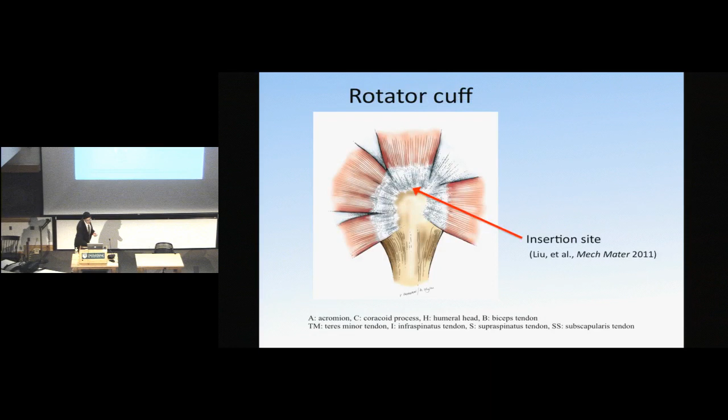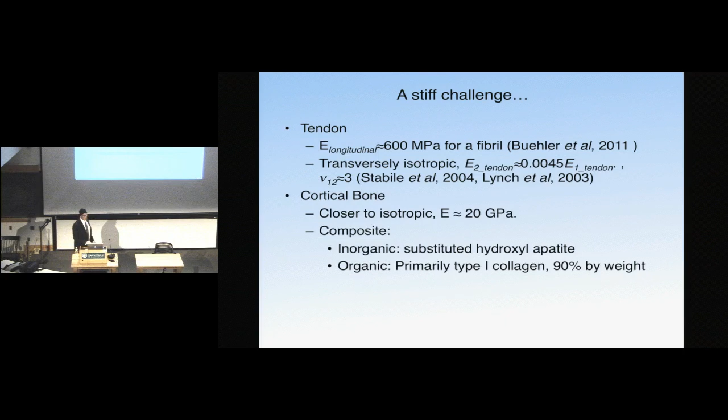For those of you familiar with the constants in materials engineering, you can see there's a huge mismatch. There's about a 2 order of magnitude mismatch in stiffness between tendon and bone. And then there are some numbers that a lot of you might not have seen before for the mismatch in Poisson contraction. A tendon could have a Poisson's ratio of about 3, and that's admissible for a highly anisotropic material. That gets connected to a material that's stiff, but then has a Poisson ratio more in line with what we're used to. Many of you know this, of course.

When you attach 2 dissimilar materials together, the challenge you have to overcome is a stress concentration. In the case of linear elasticity, it's actually a stress singularity that can occur under certain conditions at the attachment between these 2 different materials. So we're plotting shear and principal stresses, and in a very localized region, right around the edge of a free boundary, the stress can shoot up to infinity.

In an engineering structure made of metals, that's not always so big of a problem, because metals undergo plasticity, nonlinearity, in which the material becomes more compliant if it has excessive strains. That directs the peak stresses away from the point of highest stress concentration. In a biological material, the stress-strain behavior is opposite: the higher the straining, the stiffer it becomes, and the more stress is localized. So this is a challenge that the body has to overcome.

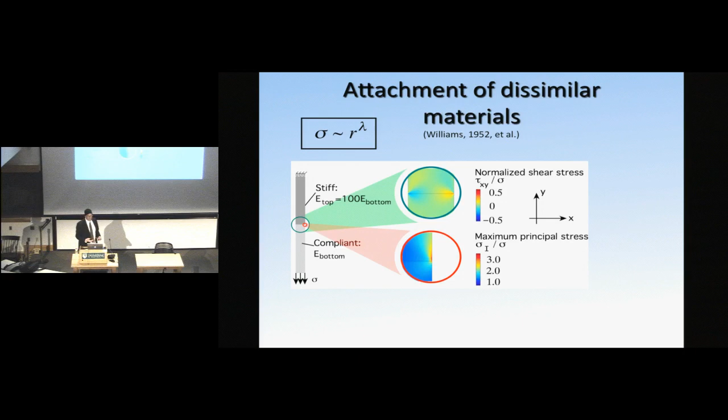You might have intuition on this. There are plenty of cases where we exploit these bimaterial interfaces every day. Does anyone here eat asparagus? No one? I hear people who do tell me that when you buy the whole plant, there's a wooden portion, a wood-like portion, and then there's the soft part that you eat. When you break the asparagus, the fracture occurs right at the interface between the 2 materials. Another place we see it in nature is at the attachment of a grape to the stem. If the grape hasn't started to dry out, so there's a gradient in material properties, when you pull on the grape, it comes right off the stem.

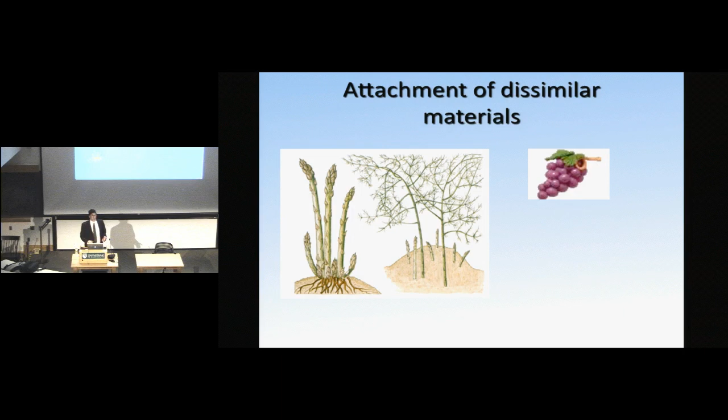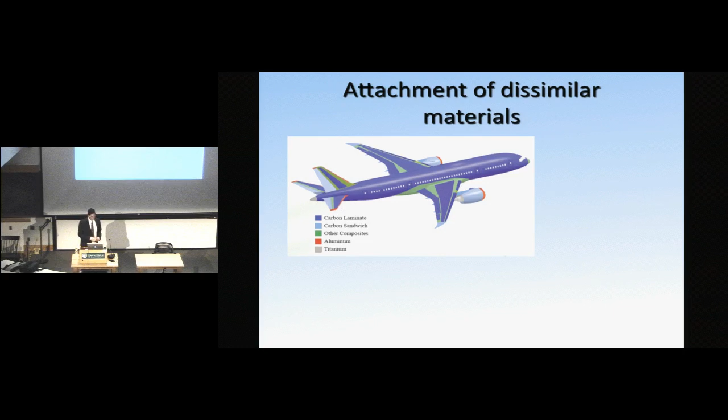Those are situations in which it's very helpful for us to have these stress singularities, but it's a constant challenge in engineering. On the Boeing 787, any place where two composites or metal and composite touch one another, there's a lot of effort put into trying to get rid of these stress concentrations. It's a big problem, and some of the first aircraft to use composite stabilizers on an aluminum fuselage met with disaster.

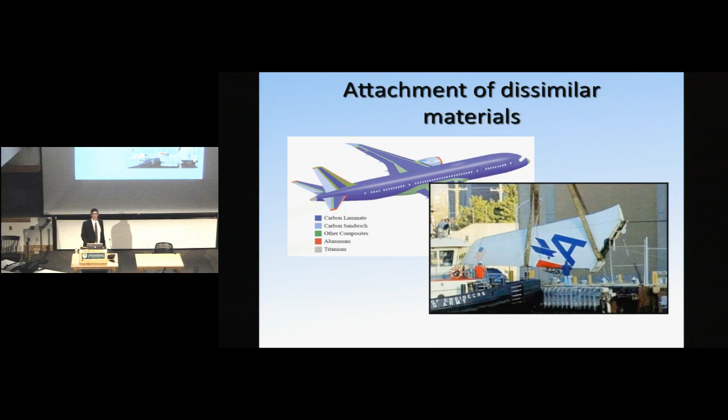So now a lot of us have intuition for how to get rid of these stress concentrations as well. A place where you see this is in putting gum under a table.

Has anyone ever tried this? You put gum under a table. The dean said he was going to be here, so you probably won't raise your hand if you have this experience. The dean doesn't seem to be here. Oh yeah, never mind.

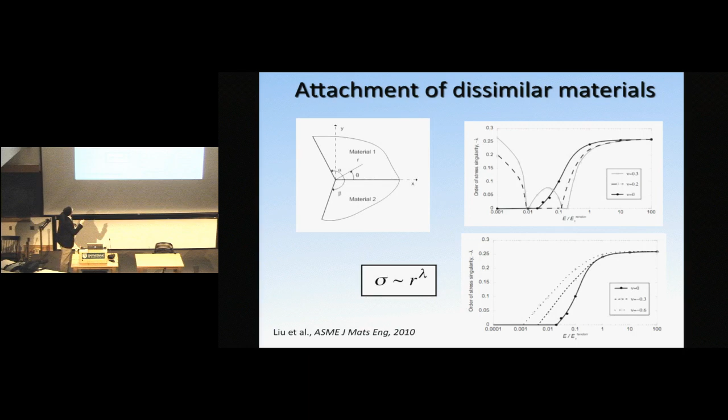So change the interface angle. Look at tendon up here, bone on the bottom, and an interface angle beta between the two. There are regions over which the order of the singularity drops from something negative, meaning the stress is infinite, down to zero. So the idea is that if you spread out the gum far enough, the lines of force will connect to the table and there'll be no singularity.

Other ways you can do it are rubbing the gum on your pants to get a bit of a gradient in there, so with a lower mismatch in stiffness the singularity damps down. And if you're lucky to find an old table with teeth sticking out so the wood can interdigitate into the gum, that works too. The body actually uses all three of these mechanisms.

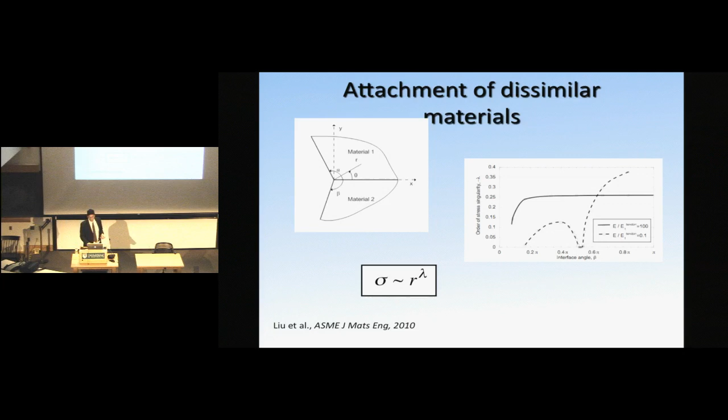There's also a gradient of material properties. We go from a material that is highly aligned and has no mineral in it to a highly mineralized material, the bone. In between, over the scale of microns, there's a gradient in mineralization from tendon to bone. And what can't be seen here, but can be seen in phase contrast X-ray, is that there are teeth coming out of the bone. At the microscale, there's a little interdigitation of the two materials.

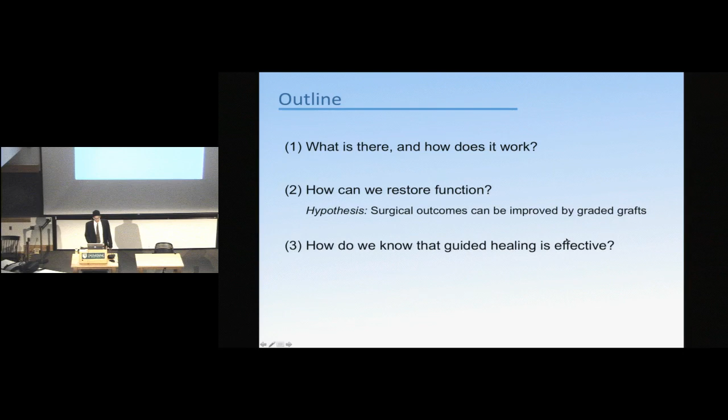We tested a rat rotator cuff tendon-to-insertion site, actually from my colleague Steve Thomopoulos, in uniaxial tension, looked at strain fields and estimated the modulus. It turns out there's a region of material between tendon and bone that is more compliant than either tendon or bone. So the body takes one of the worst biomaterial mismatches in nature and makes it even worse by throwing a piece of material in between.

This was a mystery we pursued before anything else. So we did some simple optimization analyses to get a sense of what this might do. This is an admittedly very crude model—we're taking the humeral head and replacing it with this linear elastic 3-band model just to get intuition for why this might be optimal.

It turns out that a gradient insertion is capable of knocking out the stress concentration entirely. There are 3 bands, and we're looking at the stresses in the tendon, the insertion site, and the bone. The stress concentrations show up between the two, in the region of greatest mismatch, and also at the exterior.

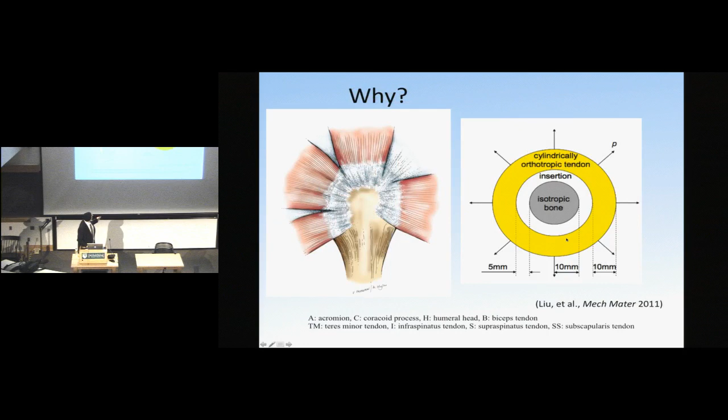But if we allow the modulus of the material to shift as a function of radial position, we can end up with a stress distribution where the stress inside the bone and at the bone-insertion site interface is lower than the remote stress. This is the maximum radial stress. This comes, of course, at the cost of increasing tangential stresses, sort of like a porthole in a ship.

And indeed, the material property distribution—these are moduli stretching from bone to tendon, or the other way around—shows that the moduli achieving this are situations where there's a region of compliant material between tendon and bone that allows stresses to be diverted from the radial direction to the transverse direction around the bone.

So the next question we asked is, how does the body achieve this compliant region? The first step, of course, the first try, would be to come up with a replication of those properties.

So we used Raman microprobe spectroscopy to get a spatial distribution of mineral between tendon and bone. I won't go into the details of how that works, but what came out was this: between tendon and bone, analyzing the Raman data to estimate the volume fraction of mineral phase, this dip in stiffness comes despite a linear increase in the amount of mineral. So stiffness goes down even though mineralization goes up. This mineral phase is 100 times stiffer than the unmineralized tissue.

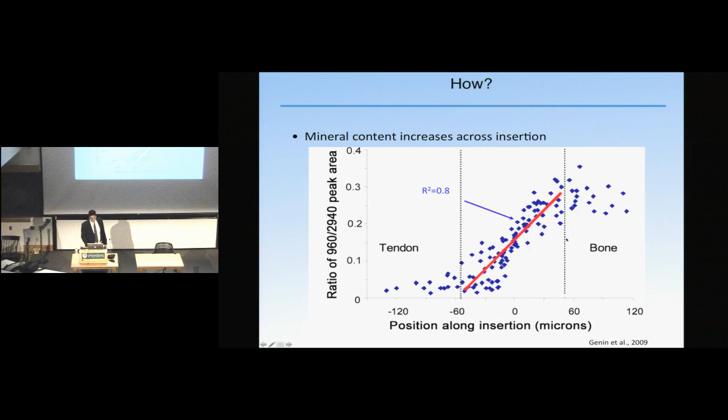So then the hypothesis we tested—we looked at orientation distribution using polarized light microscopy, and found there's also a competing gradient in the orientation distribution of collagen fibers. The idea is that collagen is a rod-like, bar-like protein, so it does best at taking stress along its axis. So there's a competing gradient, and we'll go into how that works in a moment.

It's just mentioned that the competing gradient is along the bone-to-tendon direction, but there's very little difference around the radius of the insertion site.

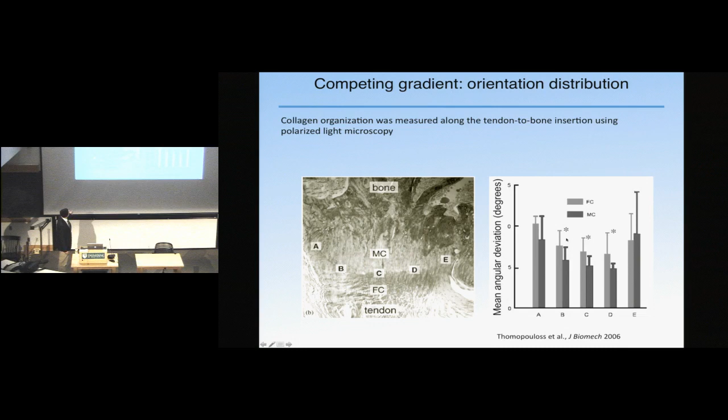Fibrils then agglomerate to fibers, and then these have large-scale undulations and are clasped together in fascicles. Fascicles within membrane give you tendon. So that structure's there, and we can integrate up over that hierarchical system.

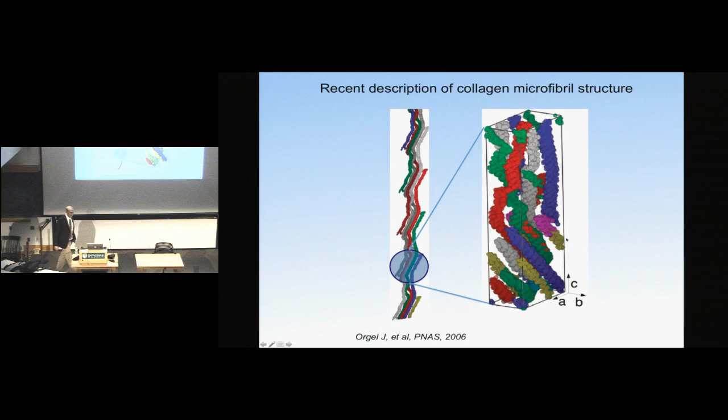So the question is, where does the mineral go inside the collagen? We have this structure, which was only recently identified, in which there's a somewhat twisted conformation of these collagen molecules. It's actually a very mild twist. This is shrunk down by a factor of 30, so it looks much greater than it is. These are almost straight rods, but not quite. So then the question is, where does the mineral go in there?

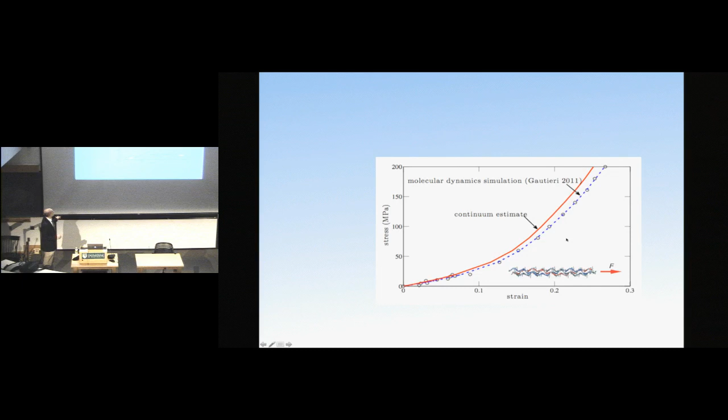Then we can get properties of these molecules. A colleague named Markus Buehler at MIT has taken this model and stretched it to end up with the mechanical properties of the fibril as a whole, and then we can get an effective continuum stress-strain relationship for one of these collagen fibrils that accounts for some of the structural aspects. I won't go into that detail.

The detail I do want to go into is where the mineral goes, and we were astounded to learn that this is a source of argument. So it's a fascinating argument. I want to summarize it quickly.

So there are some people who say that all mineral inside bone is on the interior of these fibrils, working only up on the inside. This is a TEM image where the dark phase is mineral, and where a lot of electrons go through is regions that are very poor in mineral. It's clear that there's a banding structure associated with the nanostructure of collagen that I'll get into in a moment. But then there's this AFM image which shows a fibril that has an enormous amount of mineral on its exterior, and so the plot thickens.

With AFM, the AFM community says, well, the way the TEM images are obtained is by taking bone and crushing it in a mortar and pestle, and of course that's going to knock off the mineral. But the TEM community argues that what's being done here is AFM in tapping mode, and yes, if you have rocks in Jello and you tap the Jello, you're going to feel the rocks, and the Jello is just not going to show up.

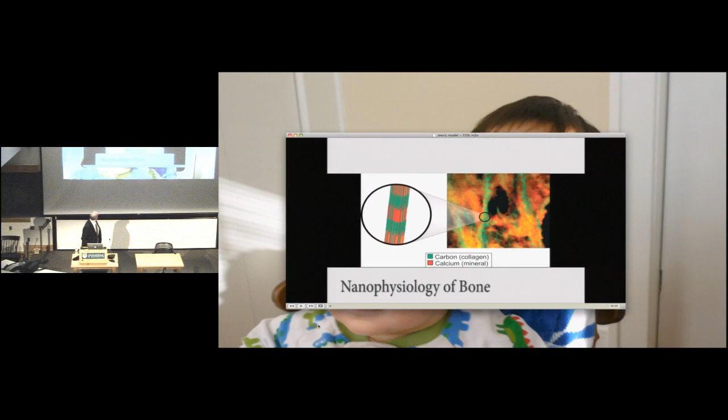And this probably won't work, so I'll instead... oh, maybe it is working. Yeah, so I'll instead pull up the movie over here. And I want to use this to describe the microstructure. So...

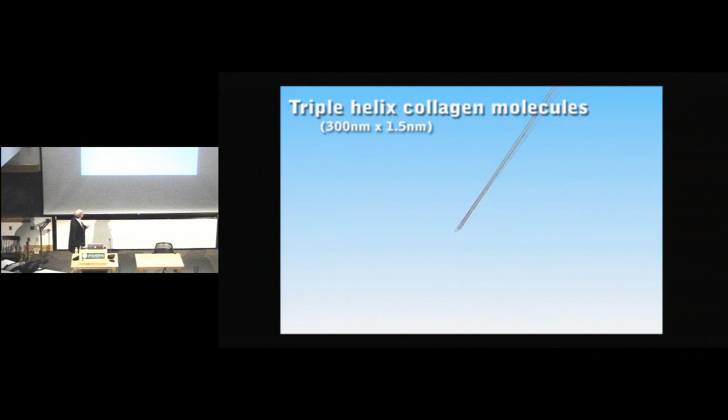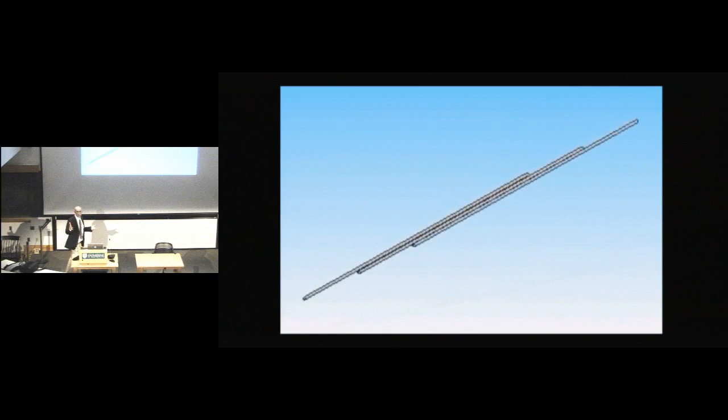All right, so what we start with in our microstructure is we approximate these very long tropocollagen molecules as rods. And then there's a certain stacking that shows up. This is going to be the basis of something like a Bravais lattice. This is how it's all going to stack together. And there's a specific staggering that shows up, based on the observations shown earlier from Orgel in the chart.

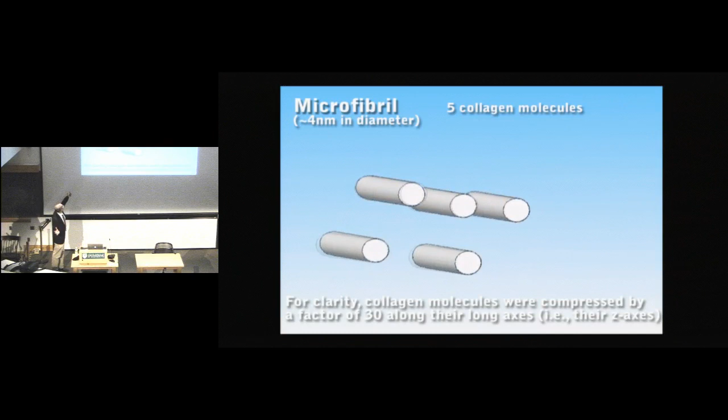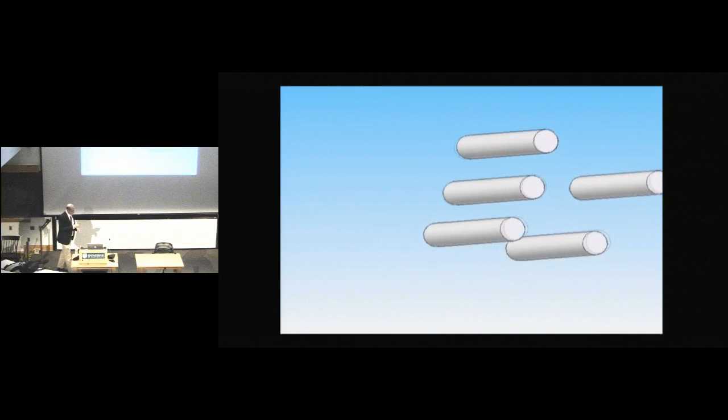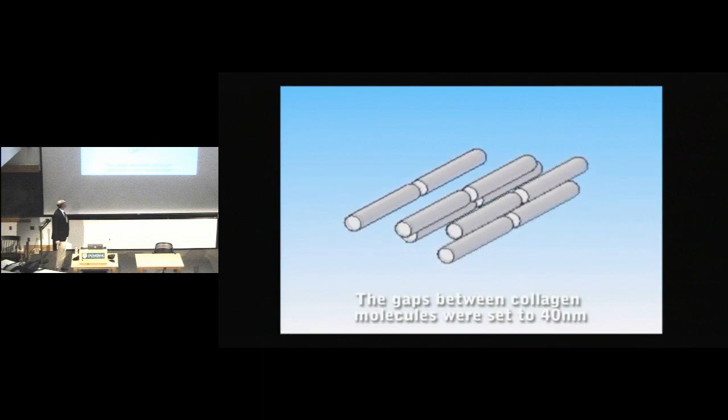And now we crush them down by a factor of 30 so you can see how they come together. So the staggering is a little bit clearer when we shrink down the axis by a factor of 30. And this should end quickly. And then the way these stack together is in a nominally orthorhombic Bravais lattice, with a very mild twist to it that we're not accounting for.

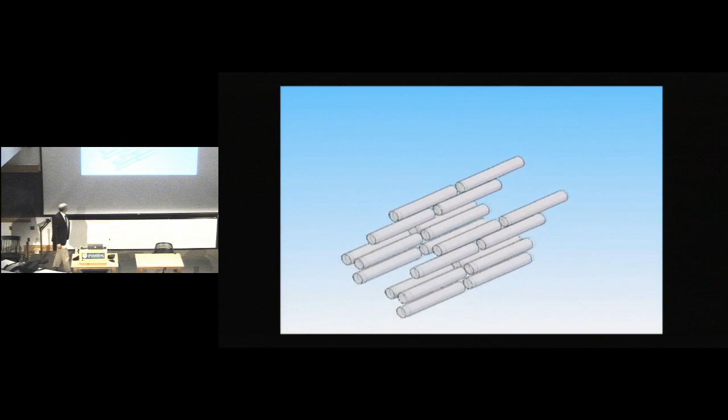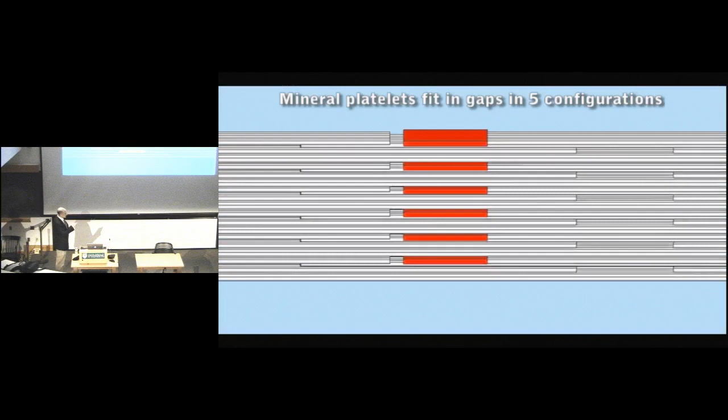And then when we take these out and stretch them back out, we end up with a structure that's very dense, that has pockets in it that can accommodate mineral only in a few directions. The mineral platelets are these dimensions, about 2 by 30 by 40 nanometers. And you can see there are only a few orientations in which they can fit in.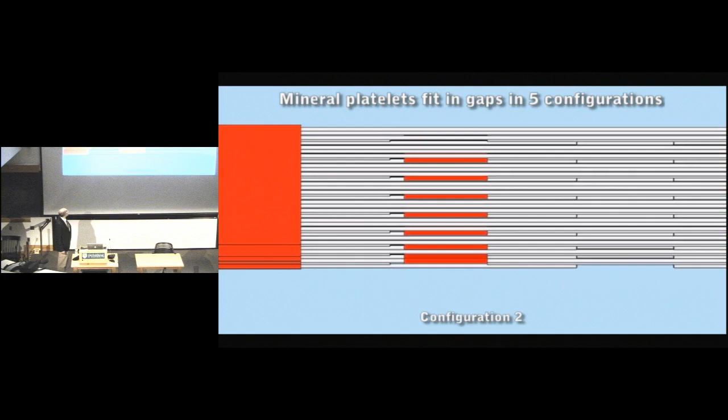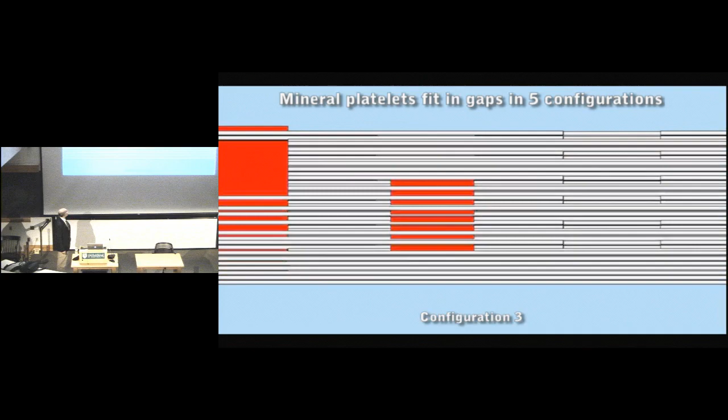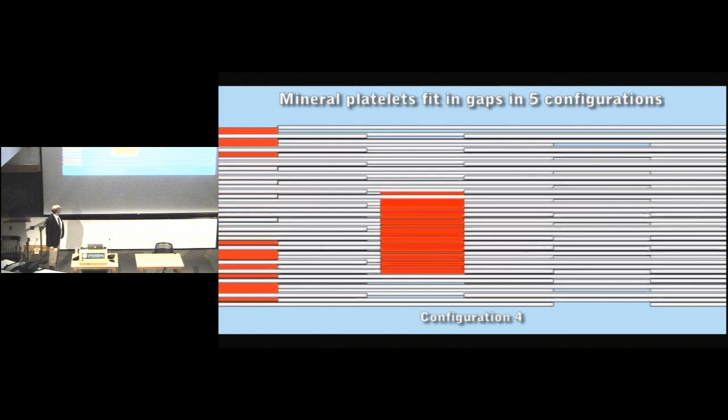And here's the second one coming up, as we roll around—there's a second one where mineral can fit in. And then there are a total of 5, with 3 independent, 3 different packing fractions that are allowable. So there's 2 more, I'm going to let it flow through these. And there's 1 more coming up here. Oh, that was—we miscounted. There are 5 configurations. Oh, there it is.

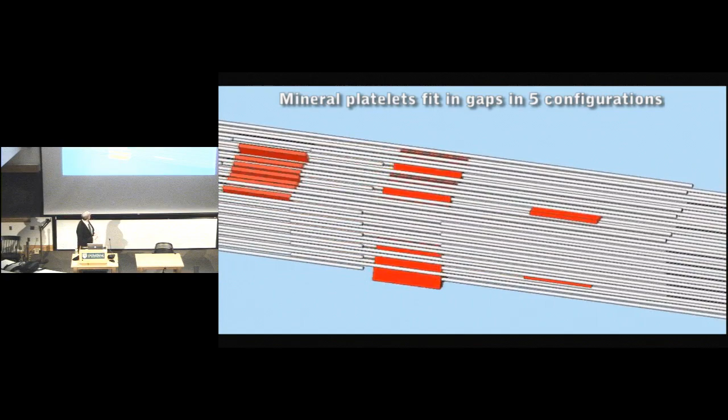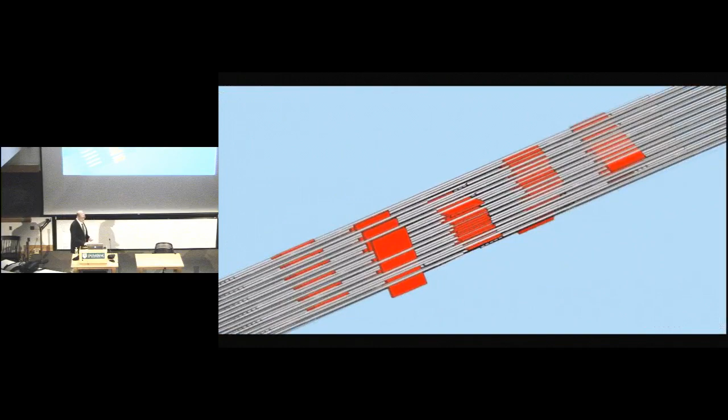And then when we zoom out, we get this banded pattern that appears, and that we see again in the TEM study. And so we think we finally closed the book on this very long debate as to what the nanophysiology of bone at this level looks like.

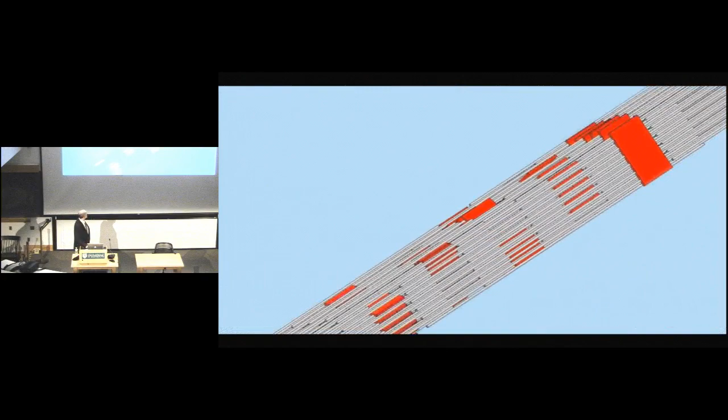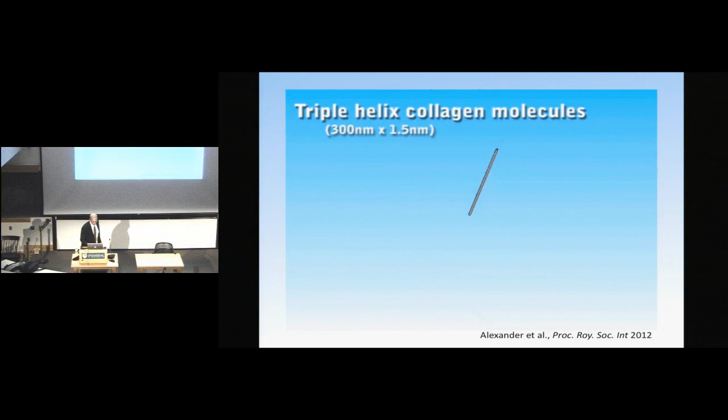There's still additional questions that I'll get to, and see if I can kill this. All right, so there's this. It's made up of this banded structure.

But there's still another question: there's definitely mineral on the outside of these fibrils, and the question is, where does it go? And the answer is we don't know. We have reason to believe that the mineral shows up on the interior of the fibrils first in development, in these partially mineralized tissues. And then the model that we believe the most is one in which mineral then extends as a sheath down the exterior fibrils and then grows to encompass the entire fibril.

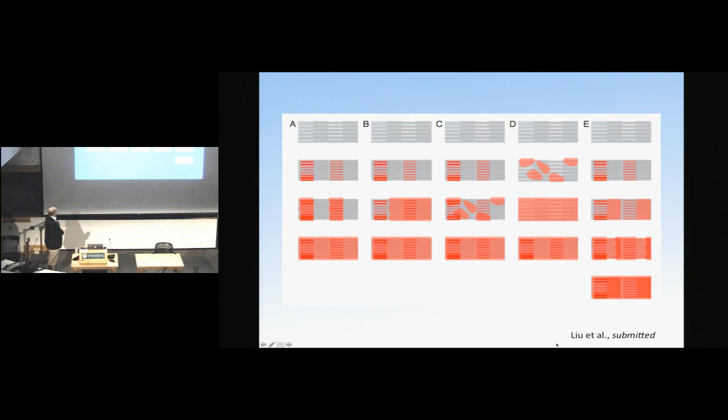But we can't be certain of that. It might grow—there might be nucleation, there might be inhibited nucleation on the exterior fibrils. So it might be that mineral grows from only one position along a fibril down to encompass the entire thing. Or it might be that it's promoted. We just do not have the data. So it might be that growth is inhibited and nucleation is promoted.

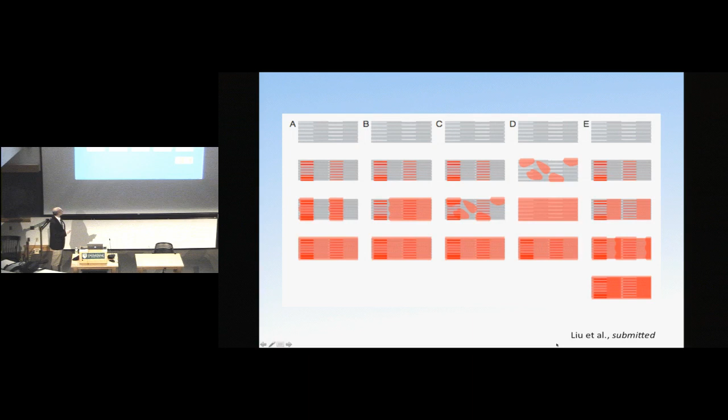So we end up with these structures that are pockmarked. There is a community that believes mineral grows first on the exterior fibrils, and only after the entire exterior is covered does mineral work its way into the interior fibrils. And then still another community that thinks there might be mineral with unknown conformation that works its way into these regions that are too small for a single Bravais lattice of the mineral phase to fit.

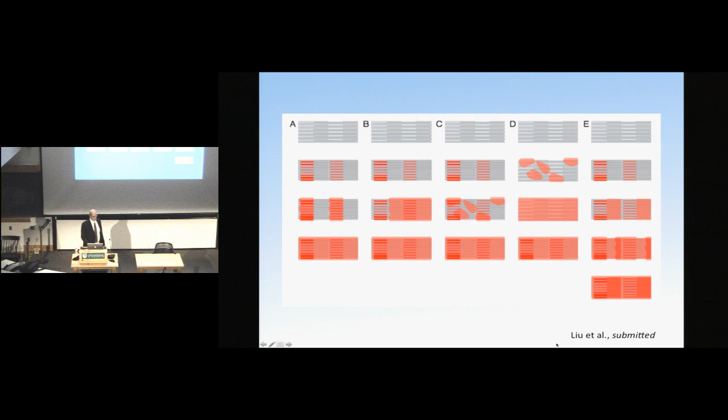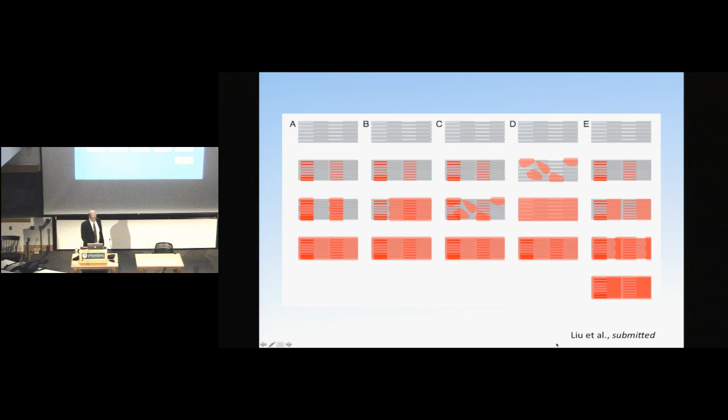So we explored the mechanical consequences of these with the goal of understanding how these properties arise. This involves a few steps of homogenization. The first step is to combine the material properties of this nonlinear collagen fibril, obtained not directly but only through molecular models—atomistic-like simulations. Then we see what happens as increasing quantities of the mineral phase work their way into the gap channels, then onto the outside of the collagen fibrils, and finally grow to encompass the entire fibril.

And we see in these plots stress-strain curves that we try to predict, and this is the stress-strain curve that was input data. This was the model from the Buehler lab, back from that molecular atomistic type model. And there's a fairly mild stiffening that occurs

that occurs with this model as mineral accumulates on the inside of these gap channels. So phi is a volume fraction of mineral. Our phi sub m at 0.21 is the volume fraction of mineral corresponding to having all of these gap channels filled. And then beyond that, as mineral starts to grow on the outside of these fibrils, you see very little stiffening.

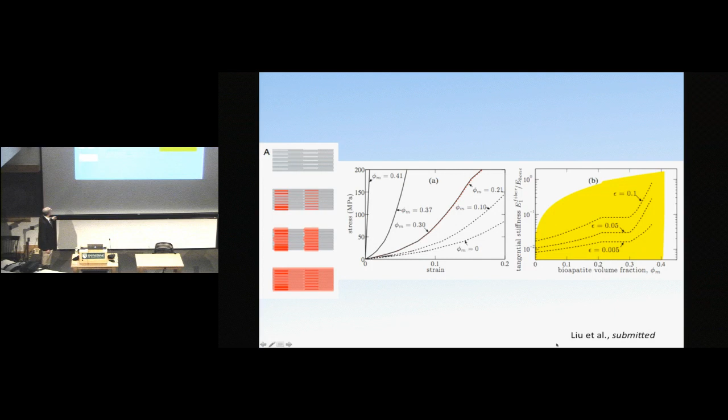We see very mild stiffening for mineral up to 21% as the gap channels are filled. Then almost no stiffening at all strain levels as the mineral grows over the mineralized gap regions. And then subsequently, the mineral shoots up rapidly to the stiffness of bone as the mineral grows to form a continuous sheath over the entire collagen fibril.

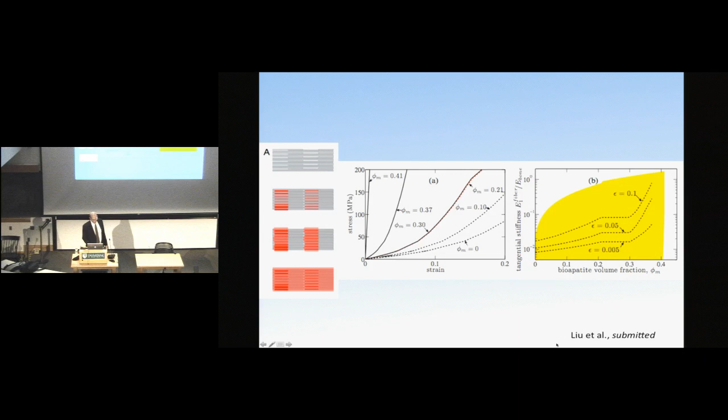And we could test a few more models of this. We also did a nonlinear analysis. I often find that linear analyses are more informative, just qualitatively, than nonlinear analyses are. And the goal is just to make certain that the linear analyses project the same trends, and then you can dive deeper into them with the linear analyses.

So now, in these plots, we've replaced the nonlinear collagen fibril with a linear elastic collagen fibril, and then added mineral to it. This allows us to take advantage of homogenization theory and rigorous material bounds.

And so, again, there are three different models plotted. The one I want to draw your attention to is the one with all the circles. This is the model with extrafibrillar mineral that accumulates randomly. And you can see a basic trend that shows up.

So this yellow envelope represents Hashin-Shtrikman bounds, the tightest bounds you can possibly get on stiffening that result from two materials when you don't know anything about the structure of those materials.

The addition of mineral follows this lower bound all the way through the accretion of mineral on the inside of fibrils. Then the bounds change once material starts to accumulate on the outside. We're actually including a little bit of structural information in here, which is different on the two sides, but just pay attention to the yellow envelope.

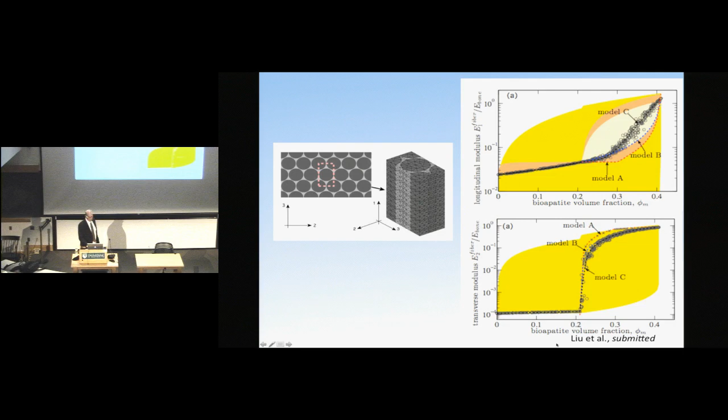As we'll see in a second, this might have implications on how the tendon to bone attachment site transfers stresses to minimize stresses at the interface.

So there's one more homogenization step, which is to combine all this data with both the distribution of bioapatite from tendon to bone, this linear rise, and also the organization, which gives an angular deviation S that shows up in a probability distribution function. This equation is meant to be an integral over the unit sphere. We take the properties we estimate of each fiber and do a normal tensor transformation weighted by a probability distribution over a unit sphere to get the actual stiffness tensor at a location along the material.

And the stiffness tensor is what determines how stresses are distributed.

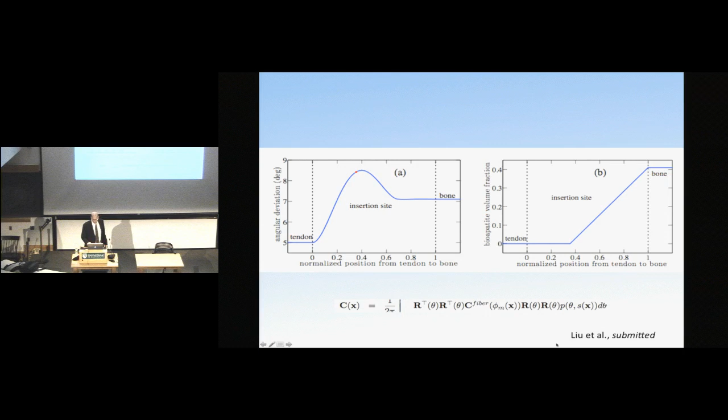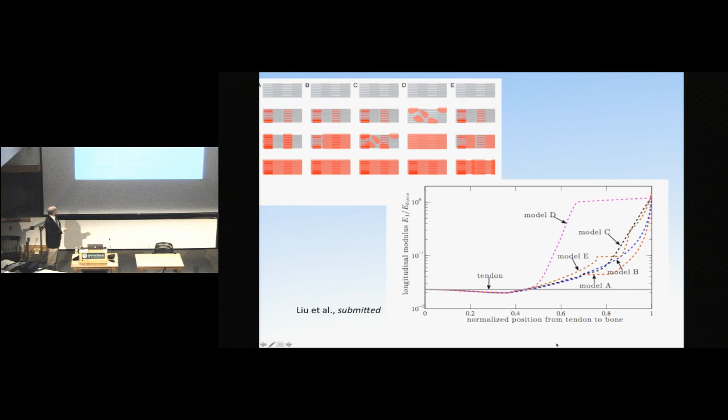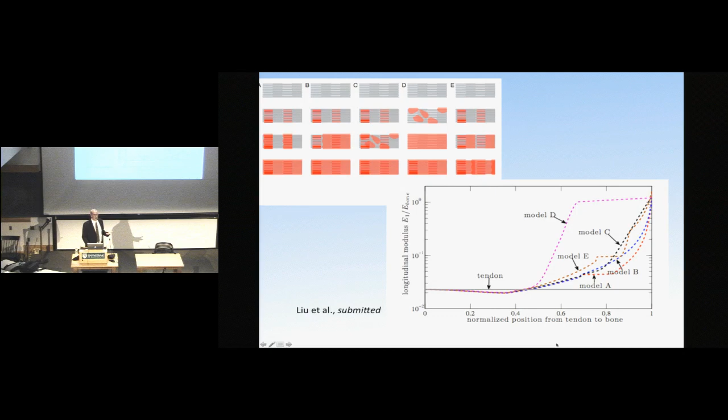So where we are now in this story is we understand how the properties of these tissues arise from their constituents, but we're still battling through TEM data.

The way the data currently stand is that we think that perhaps early in development, when the rotator cuff attachment forms post-birth, we do the same study I showed you earlier and actually see no banding on the interior fibrils. So although we think we've closed the story for where mineral lies in an adult animal, we're now trying to work out where it is in an infant.

This is important because it's in an infant animal where the tendon to bone attachment forms. It never regrows following injury, so this will now be our next step, and hopefully we won't have to revise all the models.

So in the last 5 minutes, I would like to briefly show some of the work that we and colleagues are doing to develop material grafts for tendon to bone attachment. There are 2 distinct goals we have. The first goal is to provide a surgeon with a material that can be sewn in following surgery, and that will provide stability to the tendon to bone attachment during healing.

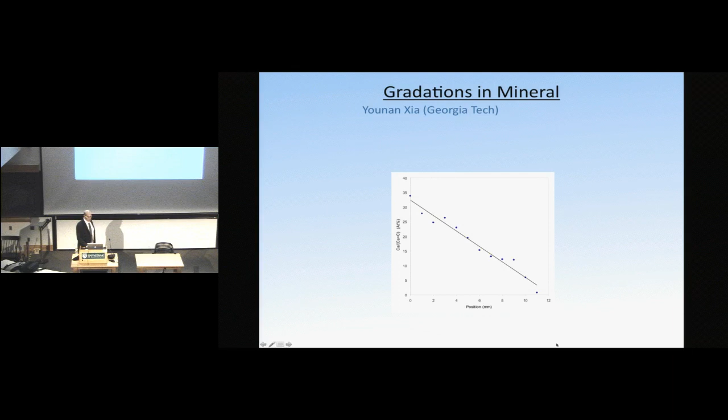So we're working with Younan Xia, who's now at Georgia Tech, to create PLGA scaffolds. PLGA is a polymer that's FDA approved and biodegradable, that replicate the spatial orientation distributions and spatial mineral distributions observed in vivo. Younan has developed a very elegant technology to do this, with very good control of the degree of mineralization, all the way from unmineralized to very highly mineralized, although we're still working on some of these structures and what they should be.

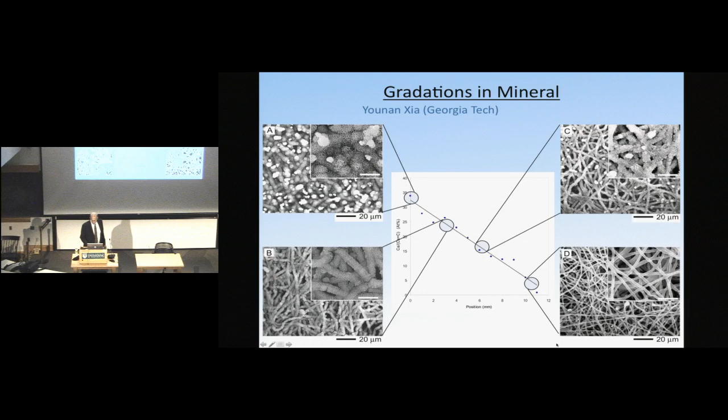I'm just going to skim over these and jump ahead. The other issue we have is the guidance of growth of proper cell types. So we can put down cells on these constructs, but the question is whether we're getting something realistic.

What we have at the tendon-to-bone attachment site is something that goes from being somewhat cartilaginous, as appears in many compressive regions in the body, to somewhat elongated and fibrous, as in the tendon. We want to guide cells to maintain or develop a phenotype appropriate for its spatial position. There's a large body of literature that says you can't do that with stiffness alone—you can't just grow a construct and hope to sew it into a body. So an area of work we're pursuing is what kind of mechanical cues we can give to differentiated or undifferentiated cells to guide them into the correct phenotype for their positions.

This is a simple example in which we developed ring-like tissue constructs. We took rat tail collagen and embedded it with undifferentiated mesenchymal stem cells from a rat, then provided cyclic loading. In a control study with no cyclic loading, we end up with pretty much all identical, somewhat fibrotic cells. But in these studies, we get elongated cells as expected for fibroblasts in the regions under tension, and rounded cells more representative of chondrocytes that exist in compressive regions.

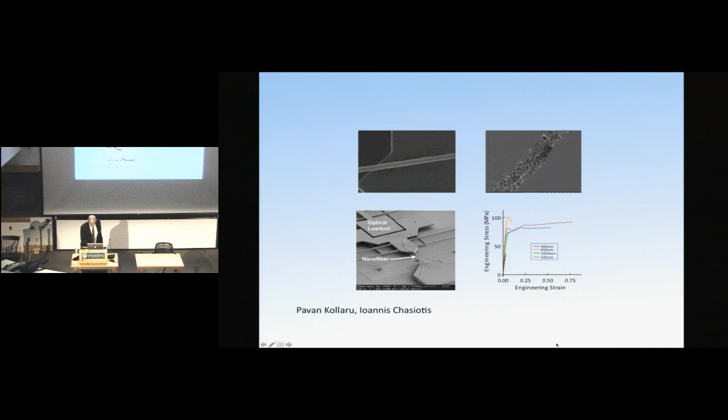I see I only have two minutes left, so I'll skip over to the conclusions. Out of all of this, what do I want you to take away?

The three points I'd like you to take away are that there are specific mechanisms the body uses to attach tendon and bone, and you have intuition for all of them—the same mechanisms you use to attach gum to a table. There's functional grading, a distribution of material properties to make the mismatch in stiffness less severe. There's morphological optimization, which is smearing out the corners. And there's what the composites community calls Z-pinning—interdigitating two materials to improve resilience. The central challenge we're overcoming is understanding morphologically, physiologically, and mathematically the strategies the body uses to attach dissimilar materials, and we're progressing on replicating these.

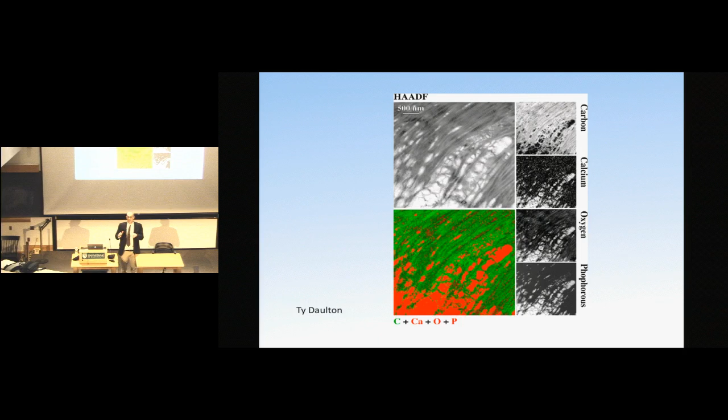So it might be that this tissue at the tendon-to-bone attachment site mineralizes in this way and then never changes throughout life. What goes on in the first month is critically important here, because that's when this grows, and it never regrows as long as you live.

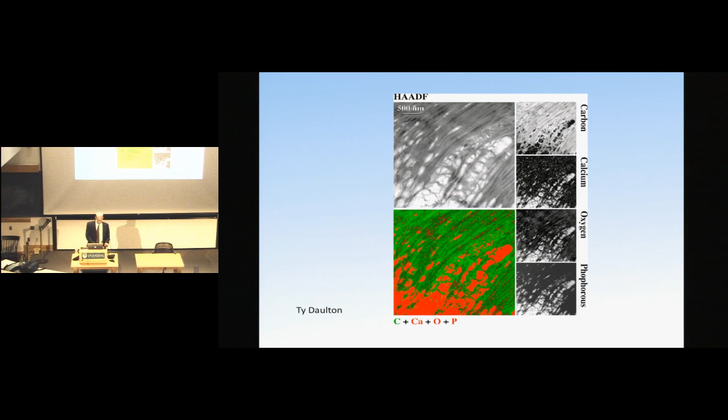Question: earlier studies weren't able to come up with enough calcium or enough mineral to explain what was seen experimentally—does your theory explain that? Yes, it does.

I wanted to tell a broad story, so I didn't tell all of it. These early studies—for those in the field, this is the Hodge-Petruska model—there was just no attempt to do the simple steric calculation of how much mineral is accounted for. And even in these studies, it's a stretch to account for all the mineral.

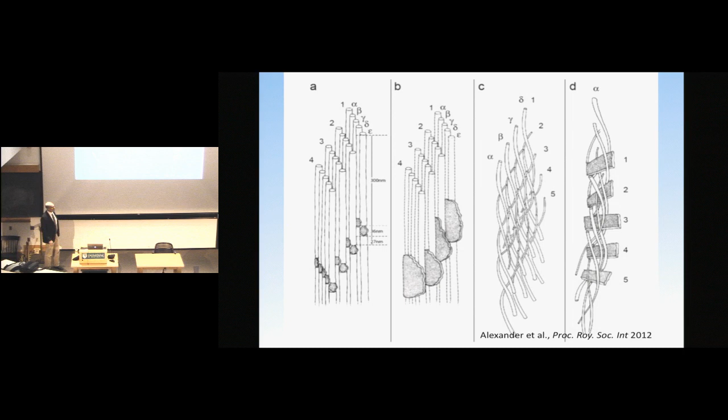So what we come up with is from this slide: if we say that although there are 5 possible orientations for mineral platelets inside these collagen structures, and then take the densest possible orientation of these platelets being pushed through these rods—so one in every 5 rods is discontinuous at each one of these gaps—then we end up with a maximum volume fraction of 21% mineral.

We know from ashing experiments, where you take bone and burn away all of the organic components, leaving only the mineral, what the mass fraction of mineral should be. Using a geometric analysis, we can figure out what the volume fraction should approximately be. We know that bone should be about 40 to 50% by volume mineral. So we're missing some here.

Then there's a wrinkle in the story I didn't tell: we cannot rule out, as others have not been able to rule out, the idea of mineral somehow in some unknown format working its way into this dense area up here. So if we do careful analysis of the concentrations in this electron energy loss spectroscopy map, we can't say for certain that there's no mineral in these gaps.